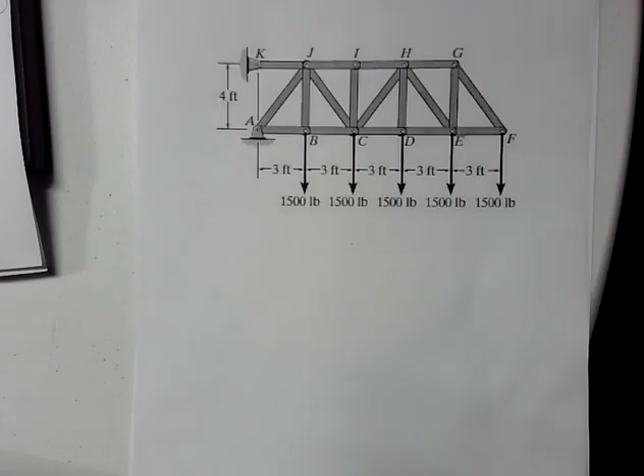Now we're going to look at the method of sections. This takes advantage of the rule that if the entire truss is in equilibrium, then each section of the truss must be in equilibrium. And if you only need to find the axial force in a couple members, this is going to be a more efficient method.

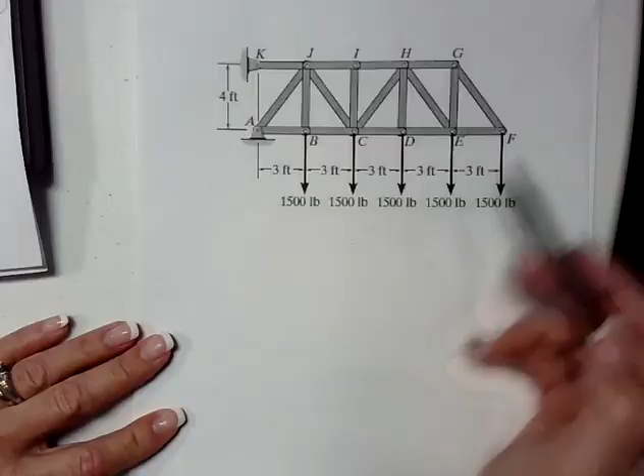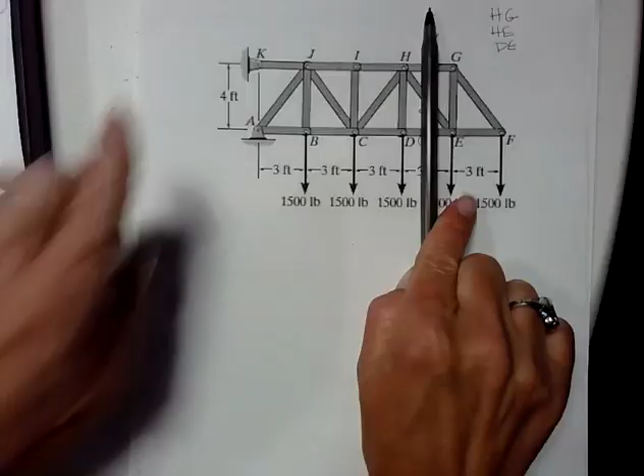For example, in this truss, if I just want to find the axial force in HG, HE, and DE, rather than start here and find the axial force using the method of joints all the way to get over to these members, I can cut my truss right here.

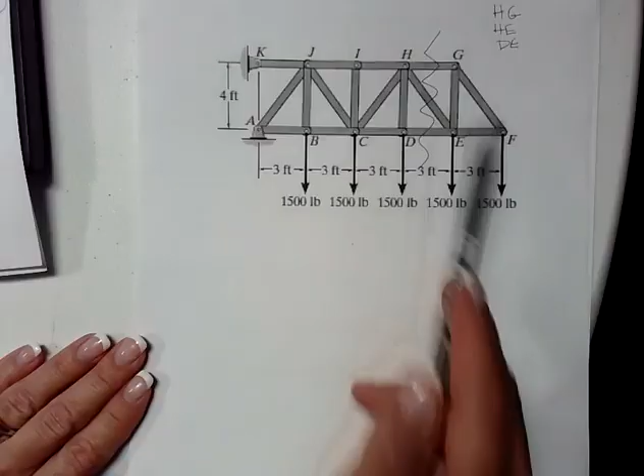The portion on the left must be in equilibrium and the portion on the right must be in equilibrium, and you can choose either section to analyze. In this example, I'm going to choose this right section to analyze because it's going to be a lot less math, fewer forces on it, and I don't even need to find the reactions at A and K if I'm solving this side of the truss. So I'm going to redraw that part of the truss.

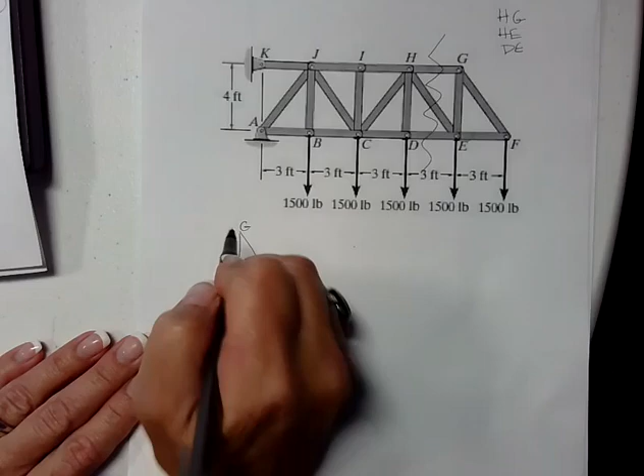I have joint E, F, and G. I have an applied force of 1,500 pounds at E, an applied force of 1,500 pounds at F. And where I cut the truss, these now become external forces to this section of the truss. So I will have a force HG, a force HE, and a force DE. These three forces are now external to this part of the truss.

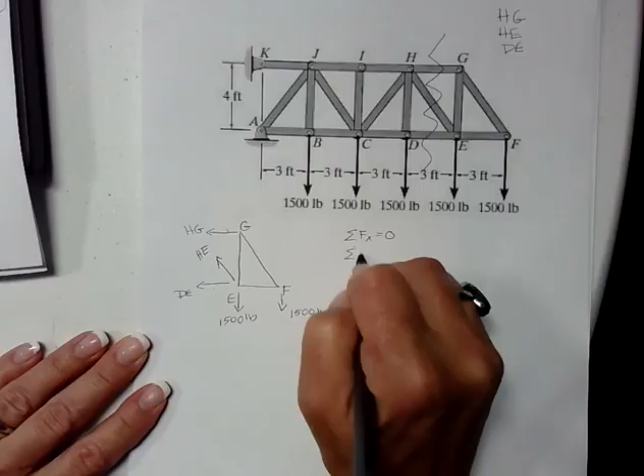Now I have three unknowns and three equations to use to solve for these three unknowns: the sum of the forces in the x direction must be 0, the sum of the forces in the y direction must be 0, and the sum of the moments about some point must be 0. So when you're solving this, you want to pick a point that's going to make the math the easiest.

I'm going to start by taking the moment about E, because I have two unknowns that go through E, which means they apply no moment about E. So my only unknown will be HG, and I can solve for that using one equation.

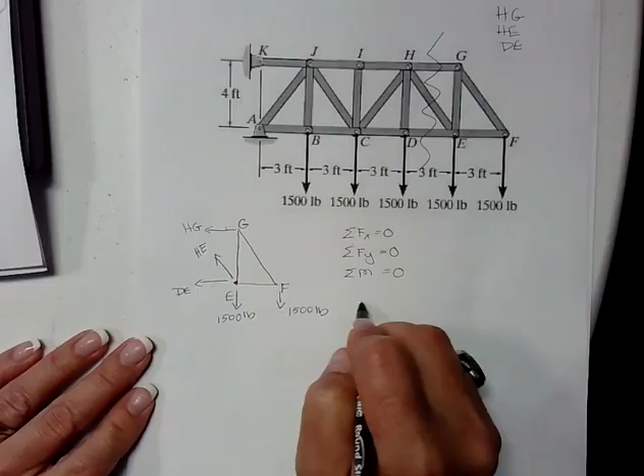So if I do that, the sum of the moments about E, taking this direction as positive, must be 0. I have HG times this distance, 4 feet. This 1,500 pounds also goes through E, so then I have my other 1,500 pounds, and that distance is 3. When I solve for HG, I get 1,125 pounds. It is positive, which means I drew it in the correct direction, so it is in tension.

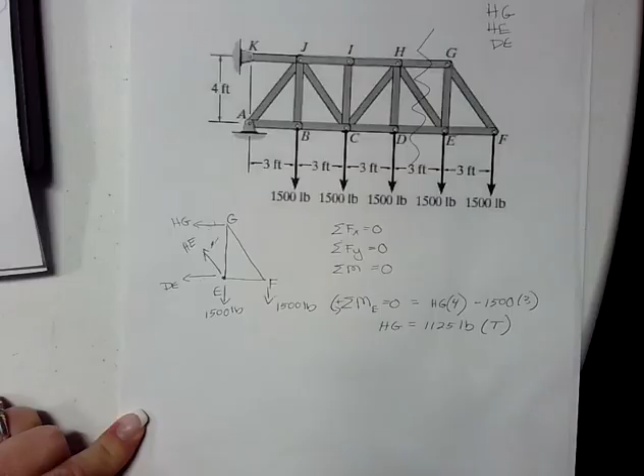Once I know that, I can now solve for HE. I guess I could have done that to begin with, using the sum of the forces in the y direction, which must be 0. So I will have HE, and this is a 3, 4, 5 triangle—3 feet, 4 feet, so 4, 3, 5.

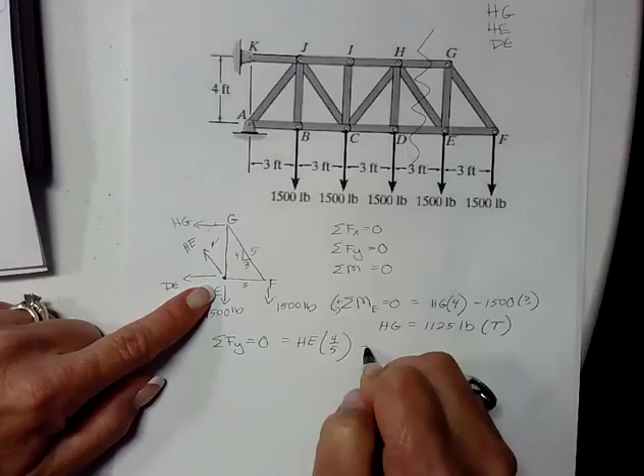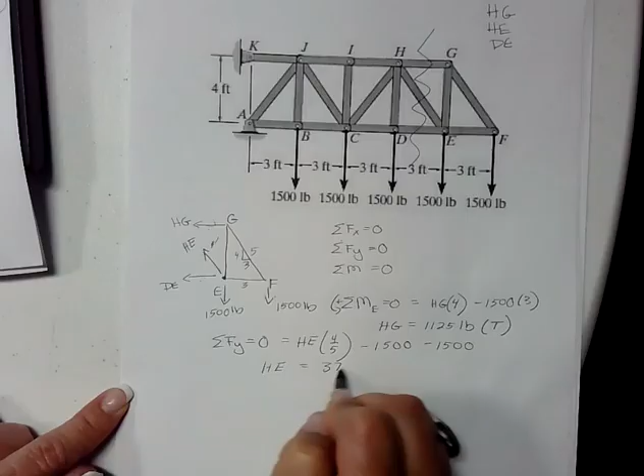So HE times 4/5 minus 1,500 minus 1,500. And so HE is 3,750 pounds, and it is pointing up or away from this joint in the direction I drew, so it is in tension.

And then finally, I can use the sum of the forces in the x direction to solve for DE. So I will have HG, which is negative 1,125, minus DE, minus HE, so 3,750 times 3/5. And DE turns out to be negative 3,375 pounds.

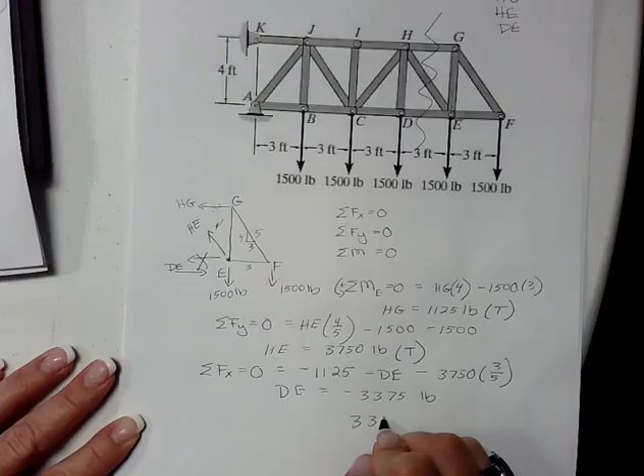So I know that I drew it in the wrong direction. So this is 3,375 pounds, but in compression. So DE, and where's HG? Right there. So these are the axial forces in these three members.

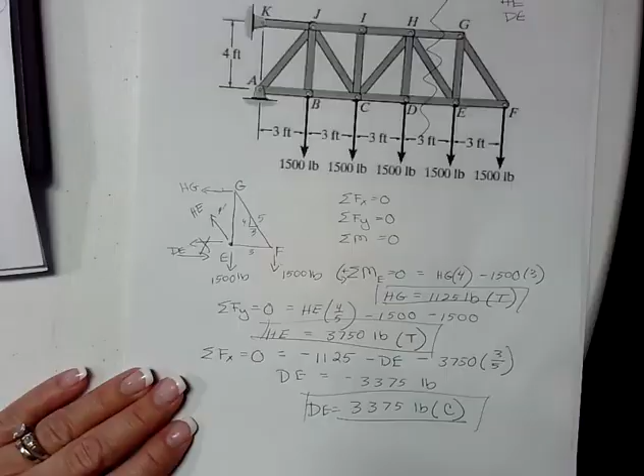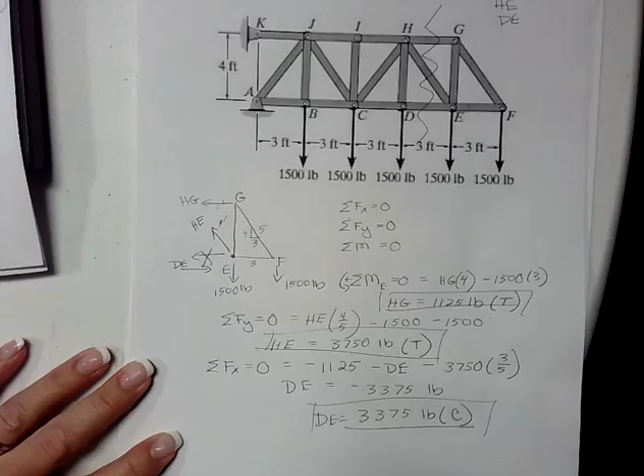So when you're doing the method of sections, you want to cut your truss where there are only three unknowns, because if you have more than three unknowns, the problem becomes indeterminate—you won't be able to solve with the three equations. So you want to cut through a section that only has three unknowns, then take either the left or the right or the top or the bottom, depending on how you cut it, and use your three equations of equilibrium to solve for the axial forces in those members.